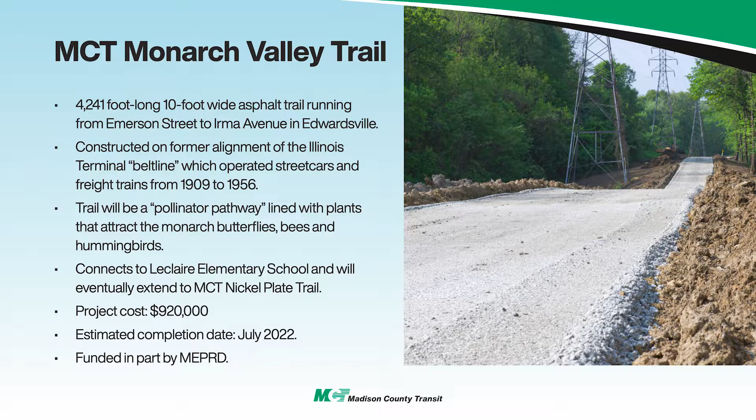The MCT Monarch Valley Trail, here in Edwardsville, is being constructed on an old interurban streetcar line. It starts at Emerson Street and goes to Irma Avenue. It's on a piece of right-of-way that MCT has owned for many years, and this is a neat trail - it's going to be a pollinator pathway for the migrating monarch butterfly.

The MCT Eastgate Connector - we're extending a trail from our MCT Eastgate and Confluence Trail over to our new Eastgate Park and Ride lot behind Eastgate Plaza in East Alton.

Formosa East Trail - this is another big project. On the east side of the Goshen Trail, we're in the process of designing and constructing a trail that will not only get to Formosa Road and US 40, but will actually bridge US 40 and connect to the Silver Creek Trail. What's exciting about this is that it will connect the entire city of Troy into the whole MCT trail system.

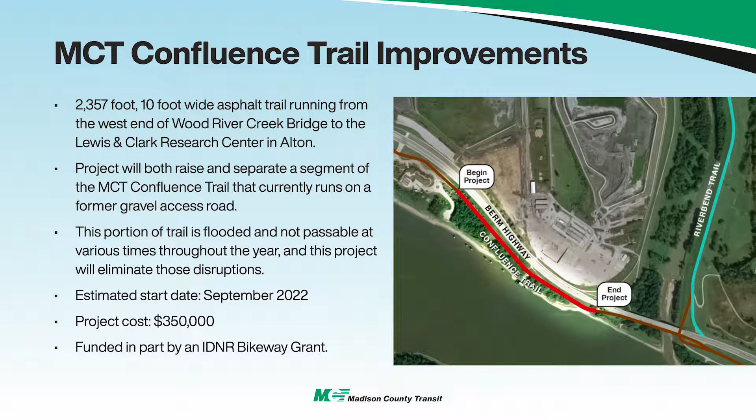MCT Confluence Trail, this is along the river, kind of across from the old power plant on your way into Alton along the Berm Highway. There's a section of the Confluence Trail that has long been on just an access road. The problem is it often floods, it's not if, it's when, it floods a lot. So we've received an IDNR Bikeway grant to raise that portion of the trail up and separate it completely from the roadway.

Yellowhammer Trail and Bridge, this is on the SIUE campus. This is another big project we received a Rebuild Illinois grant to fund. It extends the Delyte Morris Trail on the SIUE campus, on the northeast side. The university has built a trail that goes up to New Poag Road, and this will extend the trail on a portion of what was called the Yellowhammer alignment. The Yellowhammer was another old streetcar that ran through the area, and MCT has purchased 5 acres in order to make that connection to the Goshen Trail.

This is a pretty critical connection from our trail system to the SIUE campus, and one of the reasons this has been so difficult is there's a 250-foot ravine with a 75-foot drop that we'll be bridging over the Delaplane branch. It's going to be a beautiful trail that opens up that Delaplane branch valley for trail users.

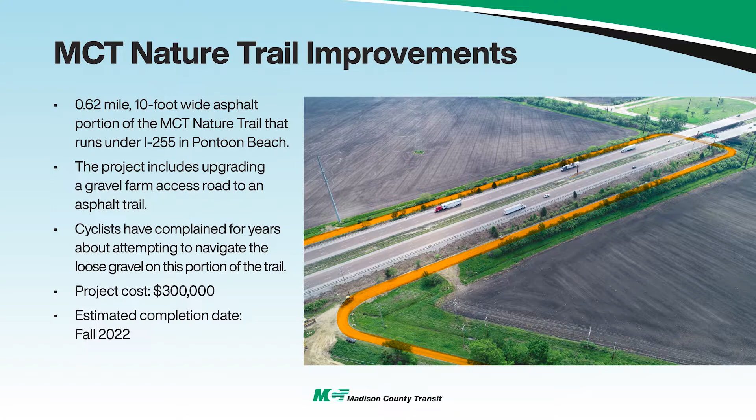Nature trail improvements, this is currently happening. There's a frontage road, an access road on the nature trail in the Pontoon Beach area under 255. We are paving that section of the trail, which is causing some angst for trail users who are used to making their way on the nature trail, but when it's done, it's going to be so much better.

Future MCT Trails projects, here's a little sampling of some of the items we're working on. We're working with officials and consultant engineers on extending our MCT Goshen Trail, which ends today in the Wanda area, north up to 143, across 143, and finding our way to Wood River and Bethalto. It's a major project, but we've already engaged an engineer to do an alignment study for us, so that's in the works.

The MCT Venice Connector, this is another important project for a community that still has all their railroads. Venice is, as most of you know, literally surrounded by railroad tracks. We want to come alongside the community of Venice and improve not just trail access, but bicycle and pedestrian access for this community that is otherwise completely surrounded by railroads.

The MCT Wood River to Confluence Trail, we're working with Wood River, still looking for that magical alignment to make the connection to the Confluence Trail from Wood River. And Monarch Valley Trail Phase 2, we want to get that trail to the Nickel Plate behind Richard's Brick over here. That'll be a few years down the road, but it's in the works.

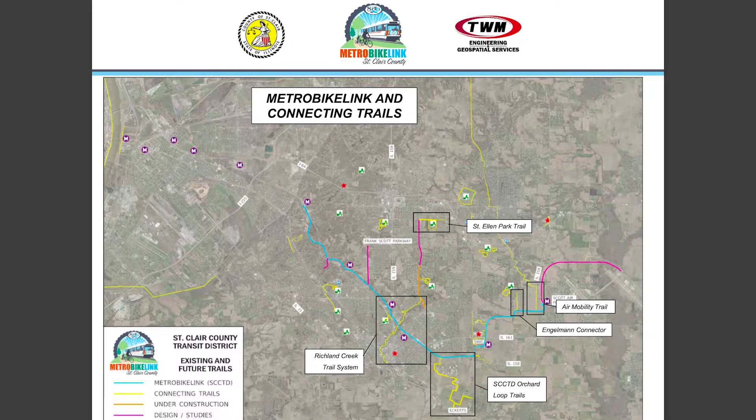We worked with the city of Shiloh on this Engelmann Trail connector, which actually connects into the MetroBikeLink system. We also have a trail from the Air Mobility Trail at Scott Air Force Base that connects in. And we worked with the city of Swansea and Belleville on the Richland Creek Trail system, which ties into the MetroBikeLink trail system.

Currently under construction this year, we have Old Collinsville Road phases 1 and 2. There are actually 4 phases of this trail system, going from 161 near the Dairy Queen in Belleville all the way down to St. Clair Bowl on Ashland. So it connects through Swansea and into Fairview Heights, and it will also connect into the St. Ellen Park Trail. This trail will also connect into the former Clinton Hills Golf Community, which has been taken over by the village of Swansea, who are making a park there. So we're making an effort to connect parks into the trail system that ties into the MetroBikeLink system.

Phases 1 and 2 are currently under construction. Phases 3 and 4 are under design, and the board just authorized 2 new trails for study with Thouvenot, Wade & Moerchen.

We have a Sullivan Drive trail that will go in from 161 in Belleville and connect to Frank Scott Parkway. There are a lot of subdivisions along that trail system, so we're trying to tie in a lot of neighborhoods to have easy access to the trail system. When you make it easy, I think that's when people will actually use the trails quite a bit. There's a lot of new subdivisions and new growth there, so this trail is under study. We hope to have that done within about a year, and then maybe move to construction the following year or so.

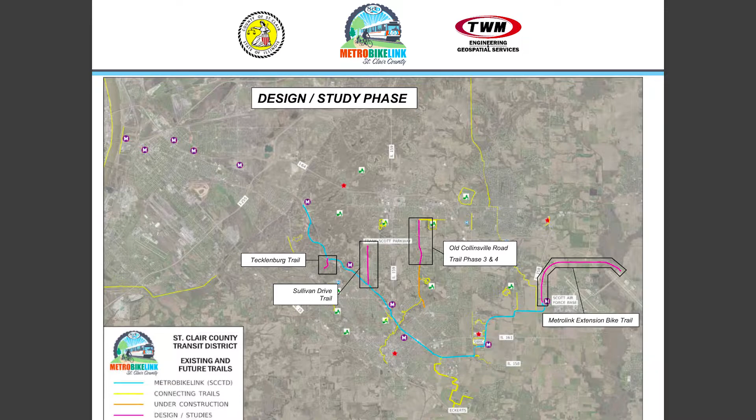This year is our second annual summer riding program, so we have a promotion, a very public campaign to get people on the trail system. We give out little rewards like water bottles, bikes, and trail trackers for people who log their miles on the system. It's kind of like a summer reading program for kids, where they track their reading over the summer and get awards. So we've got a big campaign to build awareness about our trail system.

I didn't know too much about the trail system myself until I joined the agency about 4 years ago, even though I'd lived in the community for many, many years. I knew a lot more about the Madison County Trail system, which has been well established for many, many years, and I rode that system quite a bit.

We're most proud of partnering with the Madison County Trail System, and under Jerry's leadership many years ago, we kicked in about $2 million to connect this Goshen Trail into the city of O'Fallon. We're looking forward to more opportunities to work with Madison County to connect more of our system into the Madison County Trail system, making it more of a regional system.

We have a grant for the Riverfront Trail, connecting basically Casino Queen and East St. Louis up to the Madison County Trail system along the riverfront, but we're having a little bit of difficulty with Ameren trying to get access across the area we need to. We don't want to get into a situation where we put a lot of money into a system and then have a trail that, if we go down on the levee, is going to get flooded quite a bit. We need to find a way to work around that situation so that when we invest funds into that trail system, it'll be usable most of the year and not flooded out four months of the year.

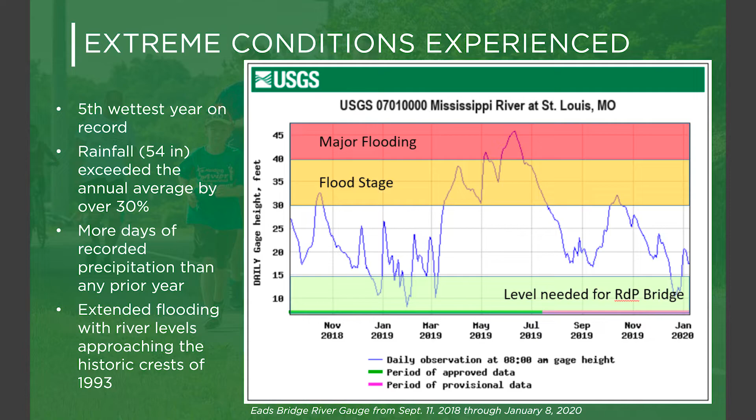So this took 8 years to build, and I want to point out that we finally started construction in 2019, right when we had historic rainstorms. The Mississippi River rose and stayed high for a long time, and that backed up the River Des Peres.

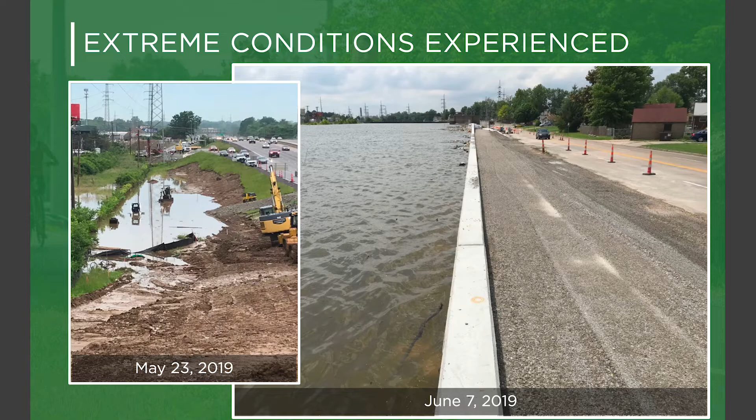And so it created this huge challenge. After we had spent all this time planning this greenway connection that the community desperately wanted, we ran into historic flooding. And it's really difficult to build a bridge when the River des Peres looks like that. So throughout the quarter, the project was delayed and delayed and delayed, very frustrating.

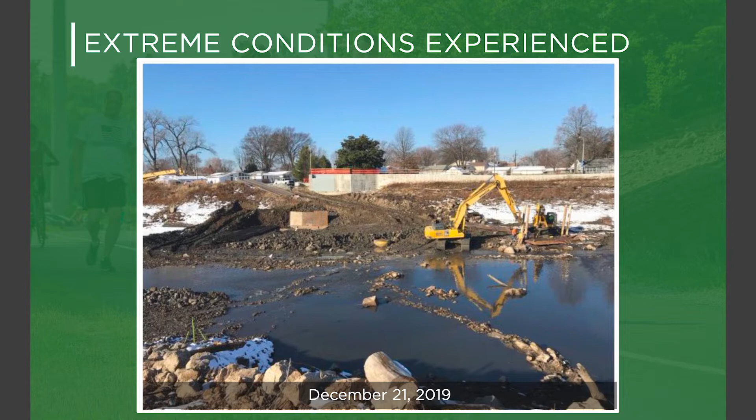But we had a Christmas present in December of 2019. Finally, over a two-week period, the water level went down enough so they could get the piers in and finish construction, and this is what it looks like today. So we had a wonderful ribbon cutting, and it was a great celebration, and now it is getting incredible use. Right now we have the River des Peres connected to Gravois Greenway, Grant's Trail.

It connects to the Mississippi Greenway. You can go all the way down to Jefferson Barracks, and we have an extension underway through Maplewood on Deer Creek Greenway going into Webster Groves and Brentwood. So it's really becoming a microcosm of what we're trying to build throughout the entire region, where all these greenways are coming together.

So now for something a little bit different, the Greenway on the Hodiamont tracks. This is a new project in the city of St. Louis that runs through seven neighborhoods on the north side, from Grand Center on the eastern end all the way to Gwen Giles Park, about the city limits on the western end, about a mile north of Forest Park. It's an old streetcar line, and it's a really, really interesting corridor.

Most of it is owned by Bi-State right now. They still retain the property from when they were running streetcars. And on the outside of the streetcar line is city alleyway. So it's a really wide corridor, actually the width of the curb-to-curb cross-section of Kings Highway, if you're familiar with that. So there's a lot of space back there.

Actually Bi-State approached GRG a number of years ago about this opportunity: what if we give you the property or sell it to you, and could you do a greenway? So it was actually Bi-State's idea. And so we didn't know. We went through a feasibility study, and we determined, and our board adopted this as a plan, that yes, we probably could build a greenway here, but it's literally going through people's backyards.

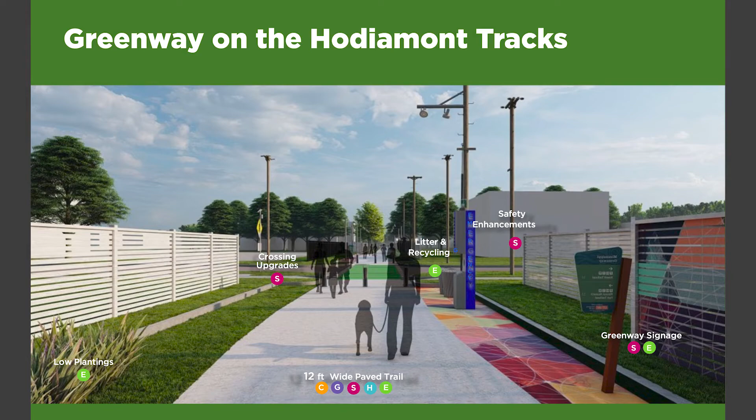And then some really creative ideas. We tried to bring what we heard into the design aspects. A lot of this is about branding and making it a special place, focusing on safety and lighting. On the one hand, we want to ensure that there's a lot of visibility so that people understand they can see what's happening. But also you want to balance that with a sense of privacy, since people want to protect what's happening in their own backyards.

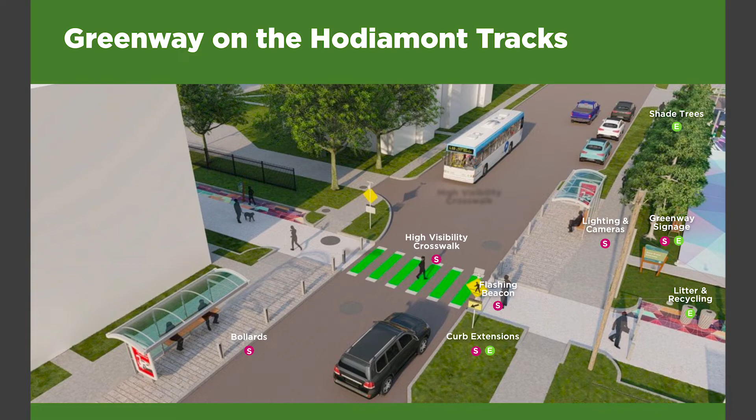And then a lot of street crossings. This is a corridor that crosses a lot of north-south running streets. So if we can work with the city on doing some traffic calming measures, and also work with Bi-State on doing some enhancements to bus stops and things like that, we can really make this a system that works for a lot of different people and provide those safe crossings where possible.

Okay, the final project I want to talk about is Brickline Greenway. Maybe you've heard about this one. It's been in the news quite a bit.

The roots of this is actually what was called Chouteau Greenway. The planning for this goes back over 20 years. It really started out as an idea to connect the Arch Grounds with Forest Park. We got to a certain level of design and planning in the early 2000s. The economy tanked, there were regional priorities that shifted, and we started looking at the Arch Grounds. This project, the idea for Chouteau Greenway, was really put on a shelf for a long time.

A few years ago, we dusted it off and said the time is right to start looking at Chouteau Greenway again. We actually did an international design competition, and all the teams that were selected, through their community engagement, came up with the idea that the real value of this is not just as an east-west running corridor through industrial areas and the central corridor of the city. It really needs to stretch north and south into the neighborhoods, north to Fairground Park and south to Tower Grove. Again, these are all ideas that come out of community engagement, which is why community engagement is so important. We wouldn't have this ambitious plan if it wasn't for hearing from residents.

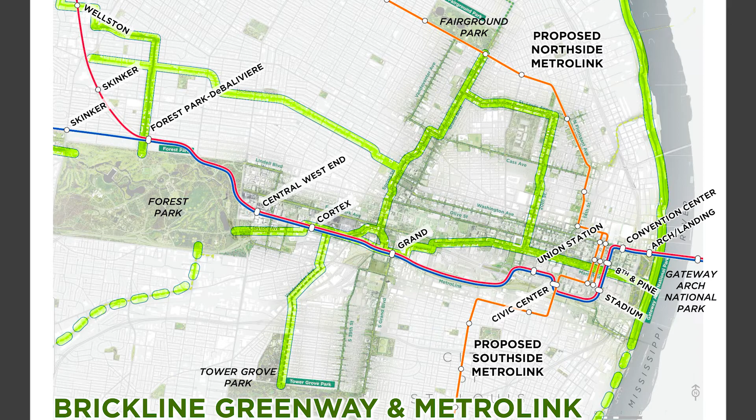And just like what you're doing here in St. Clair County, we're also looking at how we can use this as a first mile, last mile connection that ties in with Metrolink—both the existing line and potentially even the north side, south side line that is being looked at again right now.

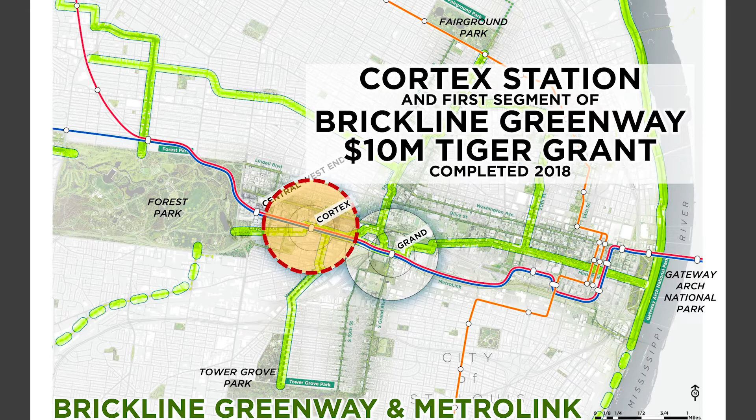The very first project of what was then Chouteau Greenway was actually the new Metrolink station at Cortex. Great Rivers Greenway was a partner on securing a Tiger grant to build that new station, and we built a quarter-mile section of Greenway. Not very long, of course, but it does get a lot of use. It really functions as an extension of the Metrolink.

So it was really a great partnership. One of the best outcomes of this project is it demonstrated to a lot of the partners in the area that the Brickline and Chouteau Greenway was real, and if we can build this one starter stretch, a quarter mile long, we've made a commitment now that we're going to build a lot more of it.

We even added lighting to it. Most of our projects are used as recreational trails, but we know that in the city, and where we're tying in with transit, we have people who are going to be using it when it's dark out, early in the morning, late at night, going to Cardinals games, jobs, school, especially in the wintertime when it's dark at 4 o'clock in the afternoon. Lighting was very important.

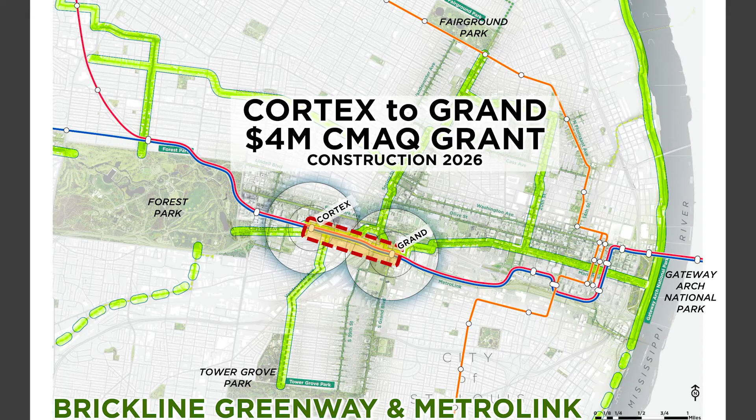So our projects in these areas are going to include lighting. Where do we go from here? We were just awarded a CMAQ grant, Congestion Mitigation Air Quality Grant, for $4 million to extend that one project from the Cortex station to the Grand Station. This one is currently under design, and we're intending to be under construction in 2026. It's a very narrow corridor, again in the middle of the city, with lots of active land uses and new development.

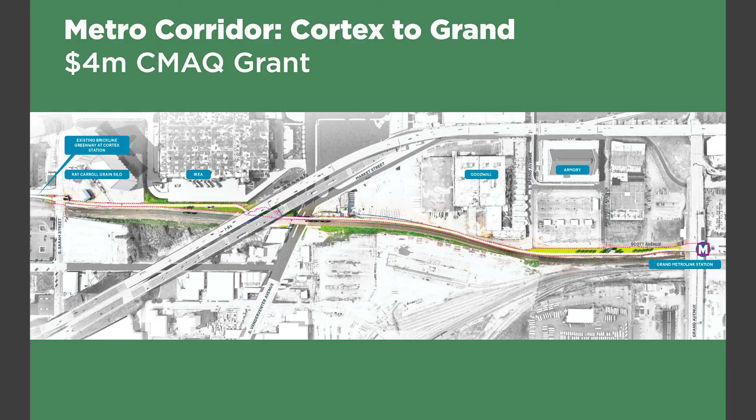But I mentioned Bi-State being a great partner. We're actually going to build this greenway within the Bi-State Metro right-of-way. This used to be a 3-track alignment, and the northern track was pulled out of service a long time ago. Bi-State has used it for storage and maintenance. They're allowing us to build the greenway right along the tracks, similar to what you have in your Metro Bike Link, but an urban project extending between the Cortex and Grand stations.

And then some imagery about what that hopefully will look like, trying to make this a very inviting, comfortable place to be. This is looking, if you're familiar with IKEA, from underneath I-64 looking east into the Foundry development. We'd use the former Norfolk Southern track, the trestle that goes over Vandeventer, and go right into the heart of the Foundry development, kind of like a mini version of the High Line.

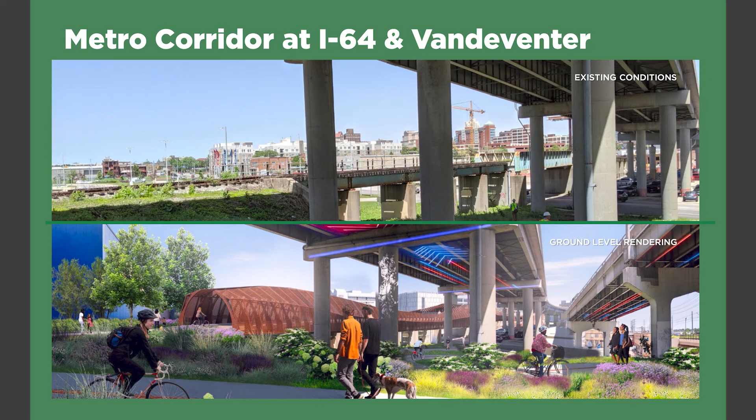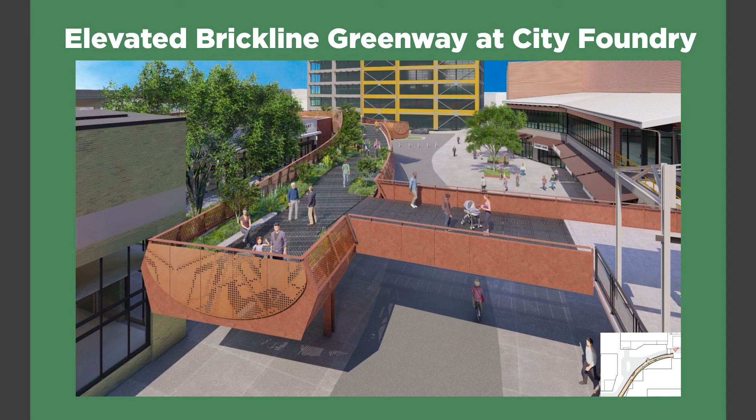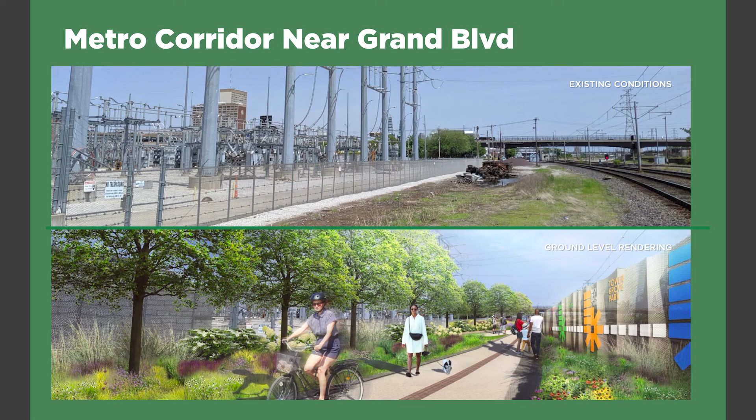This view is taken from the middle of the Foundry, right at GRG's office. We actually have a sign on our building right now that says 'future Brickline Greenway.' We're really excited about eventually having this right outside our front door. This is looking back toward Grand Avenue, toward the east, at the Ameren substation. Again, trying to make what's right now kind of an unpleasant, industrial feel a little more inviting, using landscape and fencing, environmental graphics to make it more attractive.

And then under the Grand Viaduct at the Grand Metrolink station, partnering with Metro, similar to what we did at the Cortex station, again making this a much more inviting place to be, but also recognizing that the Greenway users and the transit users, in a lot of cases, are going to be the same people. So we make sure this is working for everybody.

I want to close on this. We really believe in transit-oriented development, but also transit and trail-oriented development. They don't on their own generate mixed-use development, but together they combine to be part of the catalyst that makes a lot of these projects, and a lot of these sites, a lot more valuable. We're seeing that in Cortex right now with the amount of development happening, and other planned and under-construction projects within this exact same corridor.

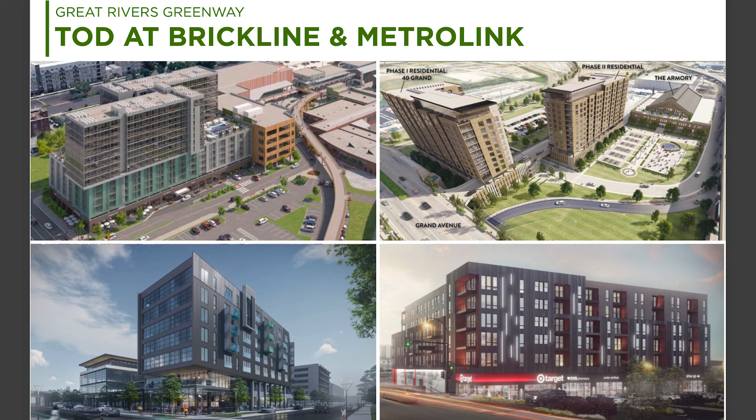When East-West Gateway is evaluating projects, and we can demonstrate the existing use and that there are more and more people coming in, that helps us score well, because we believe a lot of the users on this corridor connecting to transit means we're taking cars off the road and hopefully improving air quality. So that's it.